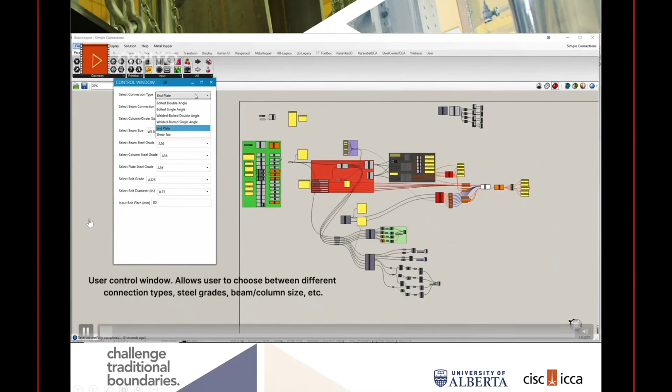So I'd like to present a little video that one of our students has prepared to just give a flavor of what this research project is about. And this one happens to be related to connection design, steel connection, or shear connection design. And within the software, the user has the ability to pick a number of different parameters, specify parameters, put limits on parameters, and also provide optimization criteria and put weightings on the optimization criteria.

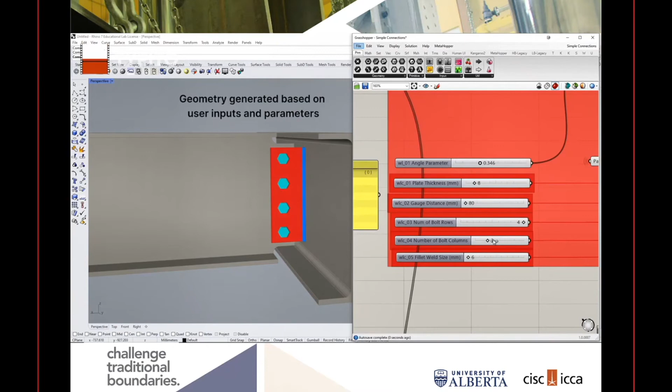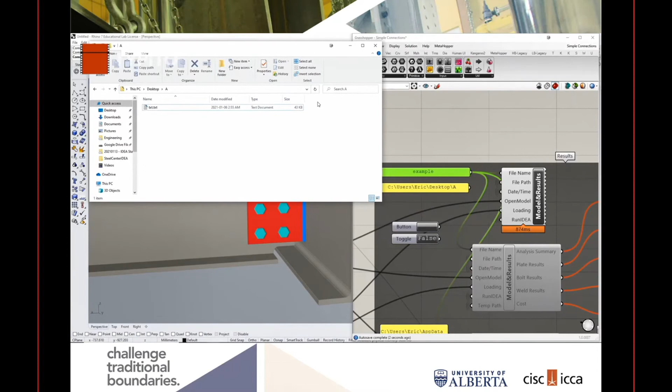So the model is created in the software. It's fully parametric. So all of these things can be changed according to the project criteria. And within the software, designs are done. So the code checking is done. We've done it with spreadsheets. We've done it with coding within the software itself. And we've also done it with a component-based finite element, specialized software program for connection design.

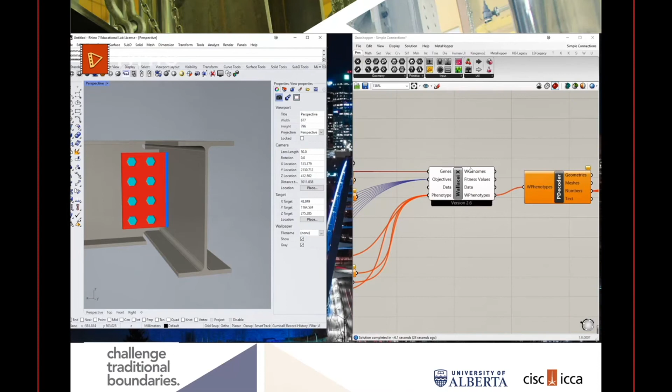And I think this is probably going to be important going forward because as we get to connections that are more complex, we may not have conventional design processes. So the final thing that is shown in this video is the optimization part. And this is taking competing optimization criteria with their weightings, and the common analogy is genetic.

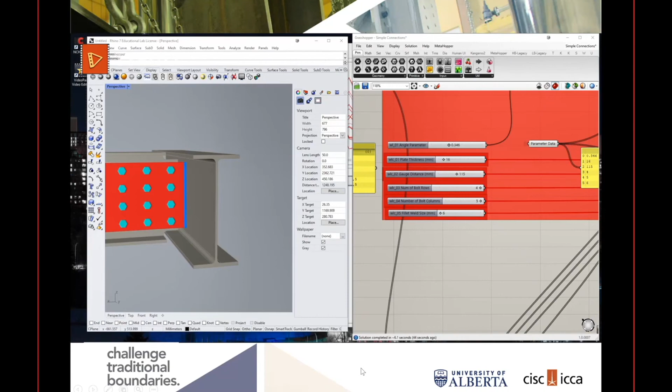So it's like certain genes are meeting the criteria and they are able to go into the next generation, and other ones come to the end of their lineage. So it's somewhat like a Darwinian survival of the fittest approach. And at the end, we have not just a single design, but perhaps a suite of designs from which the designer can select an appropriate solution.

So I think what a lot of people see in this is speed, but I don't think this is the main benefit of the research that we're doing. I think what's important is that we may be able to come up with innovative solutions that perhaps wouldn't have been considered by a designer based on biases, based on the way things have been done in the past. And over the next number of years, we may find that artificial intelligence is able to allow the steel industry to come up with some new solutions that perhaps don't even exist today.

And we're really excited about it and looking forward to sharing the results with CISC and the CISC community in the coming weeks and months.

Thank you, Bob. We're looking forward to hearing about your research as the years progress, and we look forward to your continued submissions to the CISC. Thanks again.